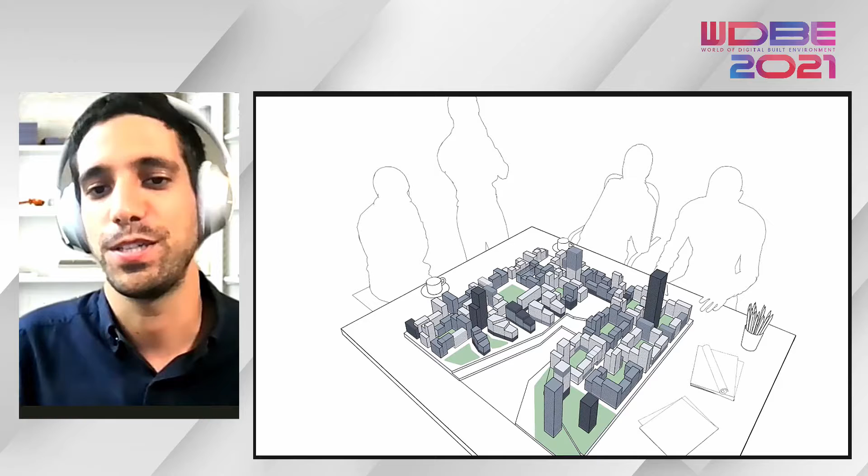This is a very complex one. As stakeholders in this industry, we need to consider multiple constraints and dimensions, like density, the functions of the buildings we are drawing, as well as living qualities such as wind and sun conditions, and even the impact our project development will have at a slightly bigger scale, at the neighborhood scale, but also at the city scale. And of course, we must consider zoning and regulation requirements, which are, at the end of the day, a set of rules created to enforce good living conditions.

And on top of all of this, we have all the stakeholders with multiple backgrounds and multiple interests. We have the architects, the real estate developers, the planning authorities, and even the people that live in that neighborhood. It's an extremely complex setup, and we know that it needs to happen very quickly.

There is a not new, but very urgent urbanization trend. And in order to keep up the pace that we are seeing on urbanization, we need to build a Paris city every week. That's kind of shocking. And we need to do it fast, and we need to do it well.

And how is really our industry responding to this urgency? Well, I don't have such good news for you. Construction is actually lagging behind when it comes to productivity. A lot has happened, of course, with the BIM revolution, but we have failed to make digital investments in early phase development.

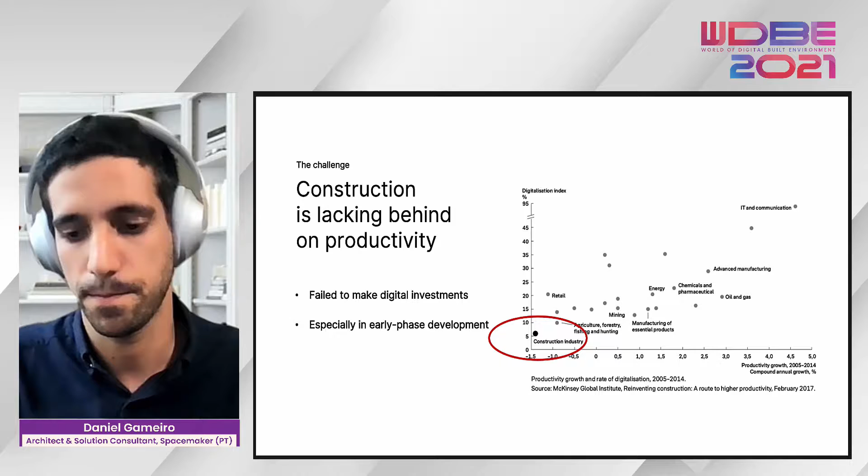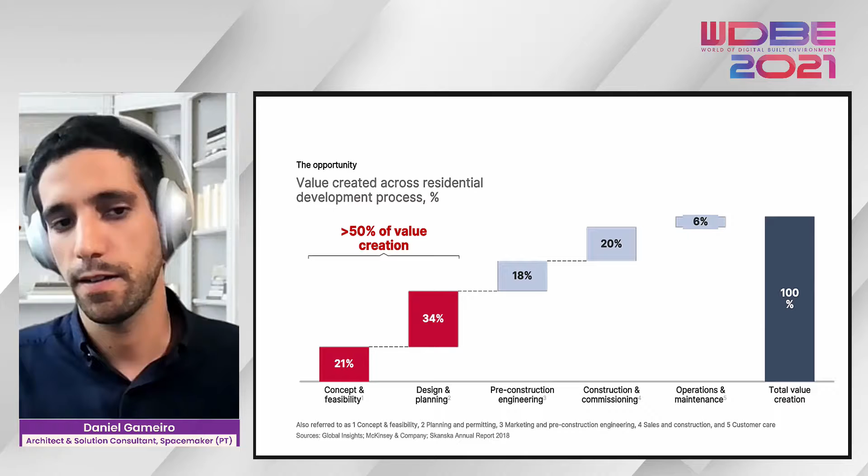However, there is good news here. According to Skanska, more than 50% of the value creation takes place between concept, design, and planning. 50%, that's quite a lot.

And how is Spacemaker solving this problem? Our technology has 4 pillars: automated data, real-time analysis, AI-powered design, and project management and collaboration. Today, we will focus more on the data rather than the generative design aspect. And everything starts, of course, with the automated data.

I will now show you a very quick demo on how a project is created in Spacemaker. So the only thing you need to do is go to a service that looks very much like Google Maps, write the plot's address, and in just a few minutes, Spacemaker fetches all the data you need and creates a 3D digital model of the whole neighborhood.

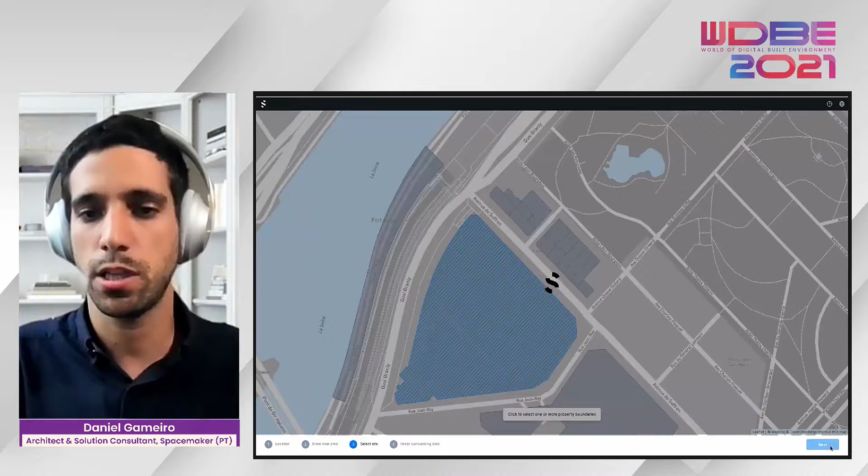The data that the software will fetch for you consists of the terrain, maps, property limits, surrounding and existing buildings, as well as noise sources. This is incredible, right? In just a few minutes, we have this 3D digital model. But then this is where the external data comes to us.

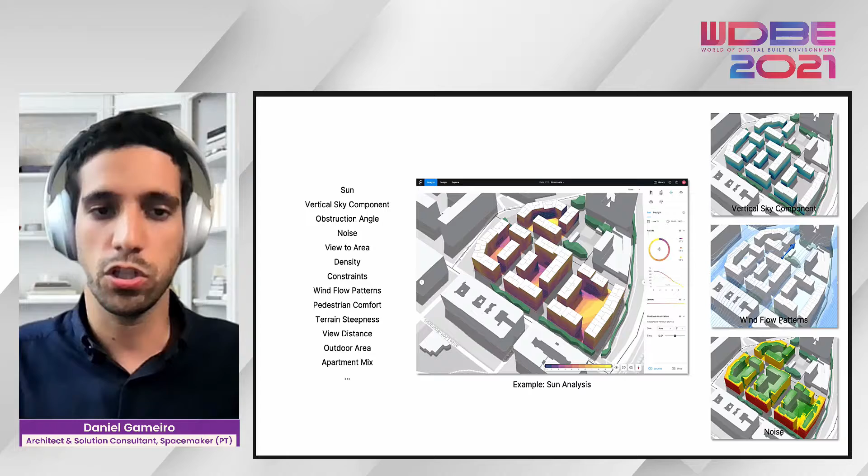Then what the software does is really start processing this data. We want to understand what is special about this site, what are the potential aspects, but also the challenges. Spacemaker runs a multitude of different analyses - these are just some examples. On the left-hand side, you have sun, daylight, noise, wind - all of the important living qualities, not only for the project, but also for the whole neighborhood. I think this is a very important aspect, focusing not only on the small scale, but also on the big scale.

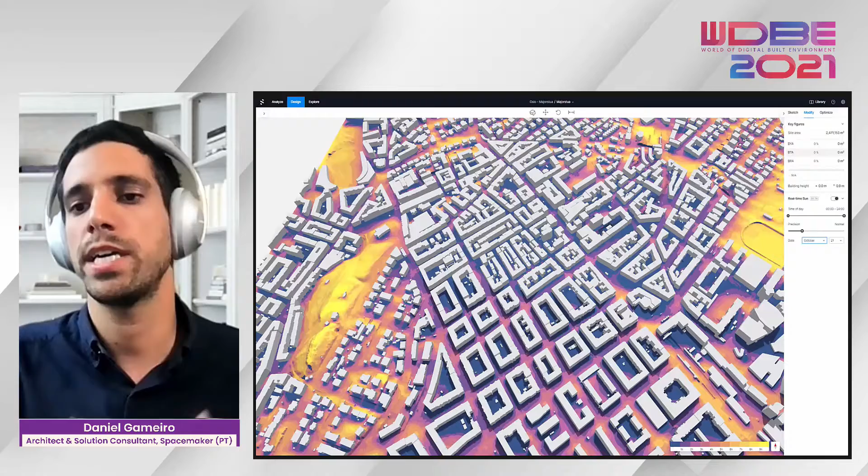And this is particularly interesting when it comes to performance-driven design. We want to understand how our buildings, our projects, perform not only in absolute numbers, but in the context of the urban setting where they are being developed. In order to understand that, what we have done is study the most popular neighborhoods all around Europe to try to understand what kind of qualities those neighborhoods have.

This is the example you see here on the screen. It's Majorstua in Oslo, and what it creates is a baseline. We can now actually compare our projects with neighborhoods that we know very well, that we know the qualities of, and we can understand if we could do better, if we are a little bit under, how much we should stretch or not.

And this is just one example, Majorstua, but we have actually analyzed many different neighborhoods all around the world. What I would like to underline here is the outcome-driven design aspect.

So let's first start with the current status quo. Let's say I'm an architect. I've now started a project. I've spent some months with my colleagues trying to develop that concept, making it very mature, discussing it a lot with my project team.

And once we are very confident about our design, what we would do at that stage is send over this 3D model to a consultant, let's say a noise consultant, which would analyze our model and point out the red flags, saying you need to revise this apartment here, it's exposed to too much noise, and advise me how to solve that.

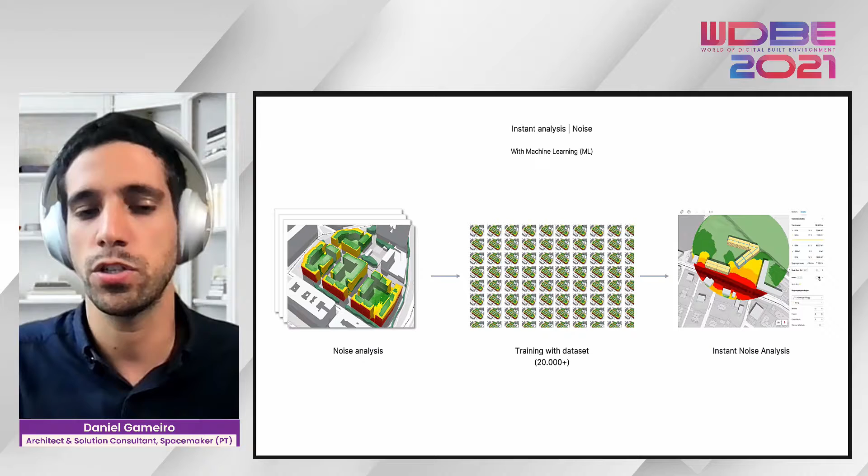But outcome-driven design really takes place when you can see things live, when you draw something and immediately see the impact that iteration has on your project as well as on the neighborhood. We really believe that's the future. It's about the performance of the buildings for those that use it, but also for those that live next to it. And what you see here is our project on machine learning for noise.

We have thousands of noise analyses that have taken place in Spacemaker. What we do is build up a data set out of it, and feed that data set into our machine learning algorithm, which then creates a surrogate model that predicts the noise conditions.

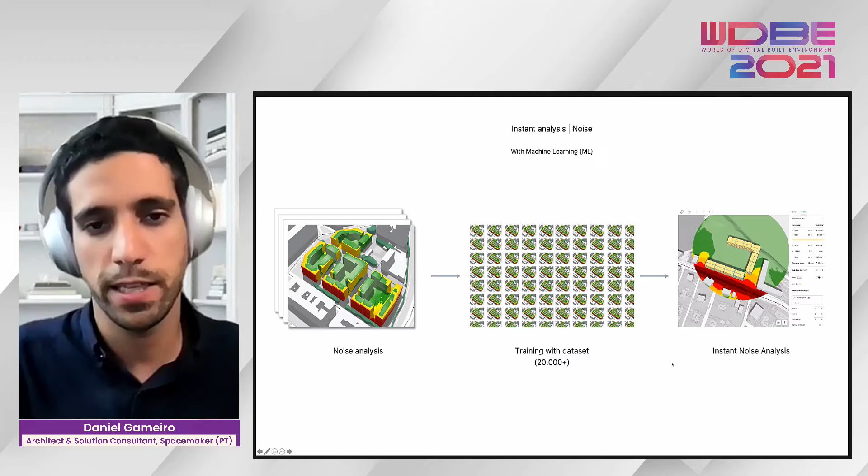Now I will play a video on the right-hand side, and you can see there. So we have these buildings, and just by making this one shorter, I click on the button, and I see immediately the results of that iteration. I do the same there, and again I see immediately the results.

This is having information at every step of the process. That's really what ultimately will enable us to create better cities. And again, we are very focused on noise because it requires a lot of computing power. The same is true when it comes to wind, so we are following exactly the same logic.

But now I would like to invite Raoul, my colleague, to explain how this technology can be used in very concrete use cases.

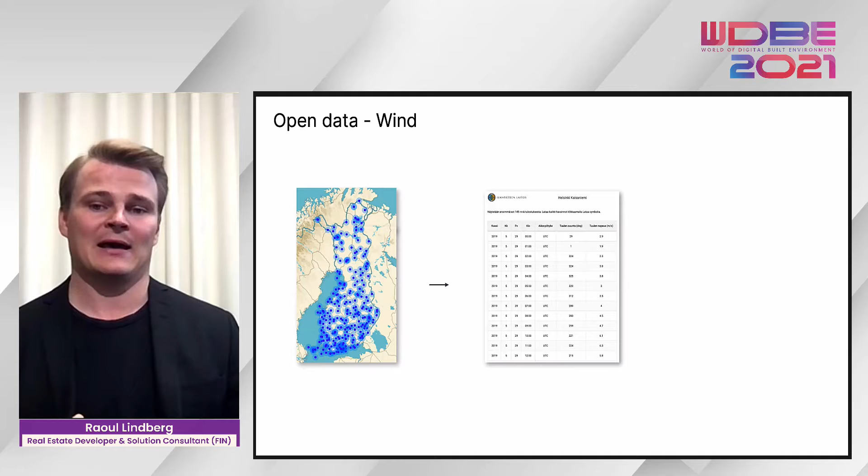So if you take, for instance, the Kaisaniemi Observatory and choose the wind direction and speed for a time period from 2019, we can now check the wind direction and speed, for example, on May 29th.

That could be quite interesting. It was actually the day when Finland won the last Ice Hockey World Cup gold, so it was celebrated outside here in the city center, and it could be interesting to know the wind speed at that time.

But if you take the average for 5 years and combine them, we get these wind roses, where we can see how many hours on average in a year wind comes from different directions and at what speed it comes.

This can be a bit more useful. If we take these wind roses and combine this data with the 3D computational fluid dynamics algorithm, we can then create a virtual wind tunnel, which we can use to simulate different wind conditions in a region from a specific direction.

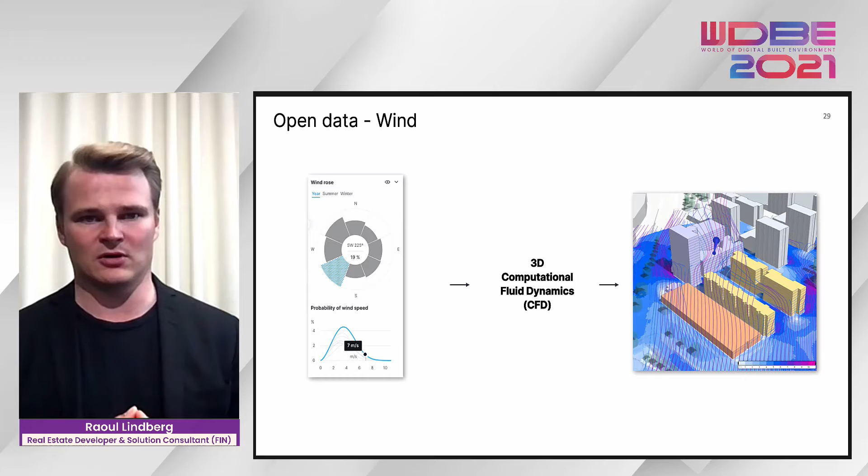This can already be interesting when you want to explore how to design your concept and how your building will affect the wind condition from one direction. But it doesn't give you the overall picture of the situation.

So if you then take all the observations for the whole year, calculate the probability and average of all of these, and combine them with a comfort scale or criteria, we can then estimate the wind comfort for pedestrians. The purpose of this assessment is to describe the suitability of different areas for certain typical activities.

In this example, you can see that most outdoor areas are not suitable for sitting, and some areas that are a bit darker in yellow or red can even be dangerous if you're cycling or for elderly people.

Andres' pedestrian analysis presented earlier would be really interesting to combine with this as well, because this also gives you a view of where it's good to actually walk or sit, or have different ways of walking.

But yeah, this was just one example of how you can take a large amount of data, combine different algorithms and criteria, and get an easy to understand analysis that we can then quickly give to the architect or the developer, to allow them to make informed decisions on the design of the area and where, for instance, to place restaurants, kindergartens, or other things.

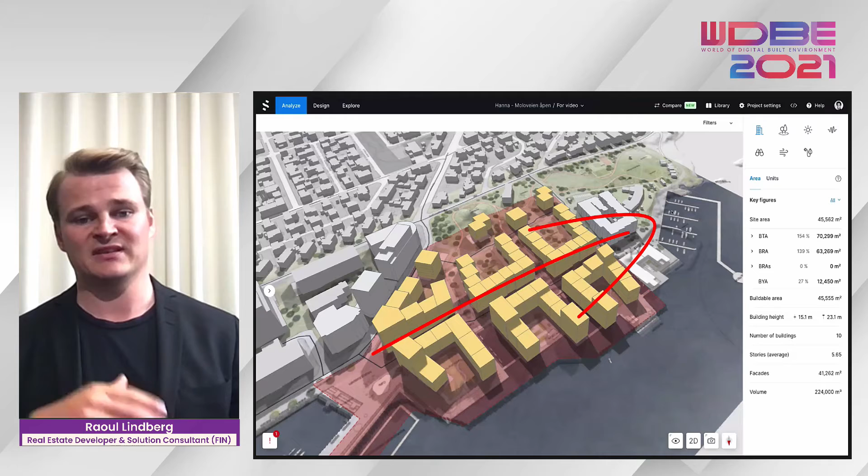So we met with the architects, Schmidt Hammer Lassen architects, the municipality, the consultants, and of course also the developer Clemens Eiendom. Together with the group, we understood how the street could become a successful public space, based on both wind conditions and other conditions.

Now you can see here a comfort scale for the whole year, based on these wind simulations for 8 different directions. On the scale, you can see with the colors that red means uncomfortable, and green means good wind conditions or somewhat better wind conditions.

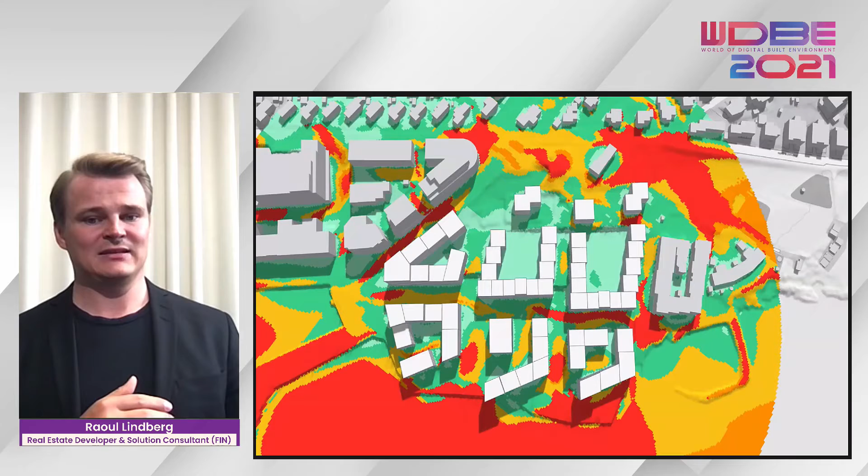As you can see, the group also understood that it wouldn't be easy, and the architects needed to iterate on this. They did hundreds of iterations on the concept and got wind analysis for all of them without involving other consultants, so they could iterate on it, see how it would change, and the whole process was documented with the municipality.

As you can see, they improved the conditions significantly for the whole year compared to the first proposals, a dramatic change even though the changes were small. And even now, if you look here at just the summer, almost the whole project was green.

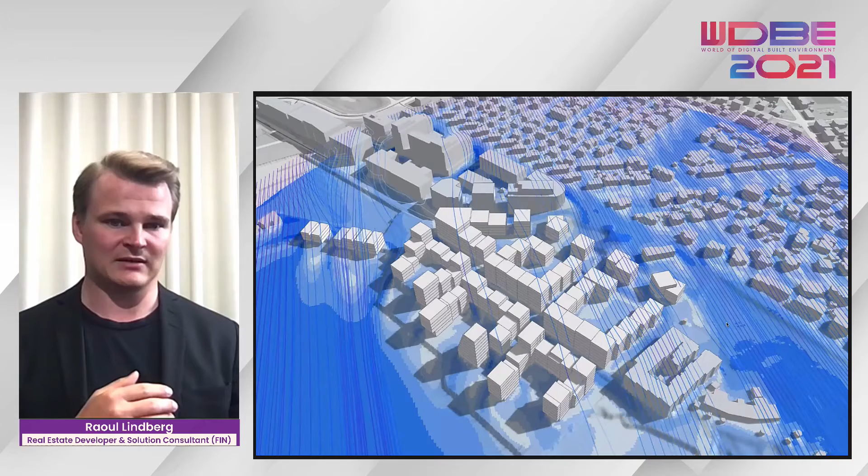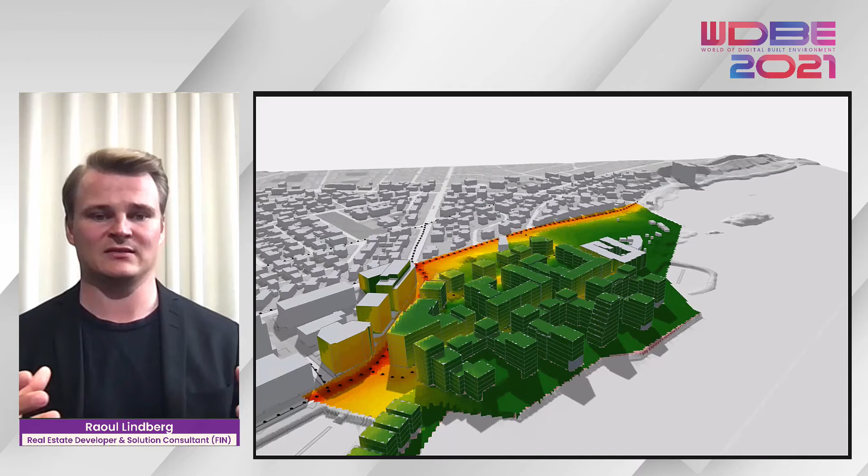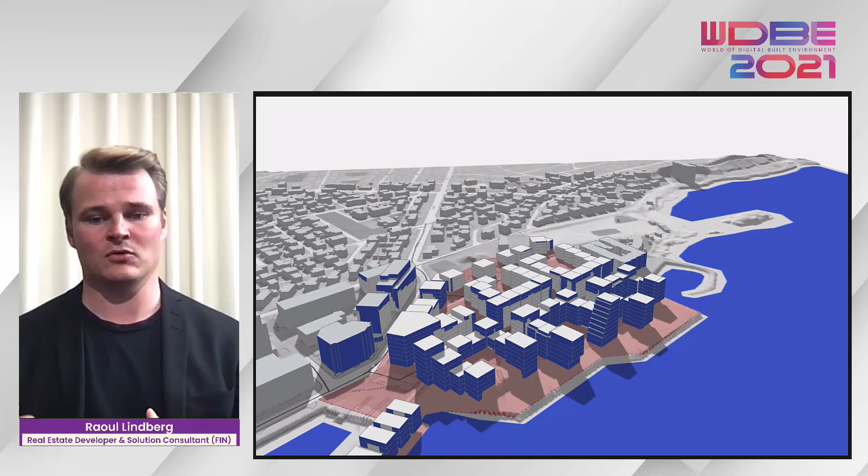Other conditions were also important to look at, such as sun conditions for different dates of the year, but also noise conditions. So noise analysis for not only the proposal they created, but also for the neighboring buildings and surroundings, to get an understanding of how it will affect noise, sun, but also the view from the apartments. Especially here, as it's really near the sea, how many apartments have sea view, and how will the new proposal change the sea view for the neighboring buildings, and be able to document it, get data points to show, and have the discussion based on these facts.

It speeded up the dialogue, saved time and resources, but also strengthened the whole planning process. In the end, it's a win-win situation where developers get quick and fact-based dialogues together with architects, while planning authorities can easily verify if the project performs as well as the context allows. But most importantly, it's for the end users, the citizens, to get areas and apartments that are actually optimized for living qualities and not only for the financial qualities of the buildings.

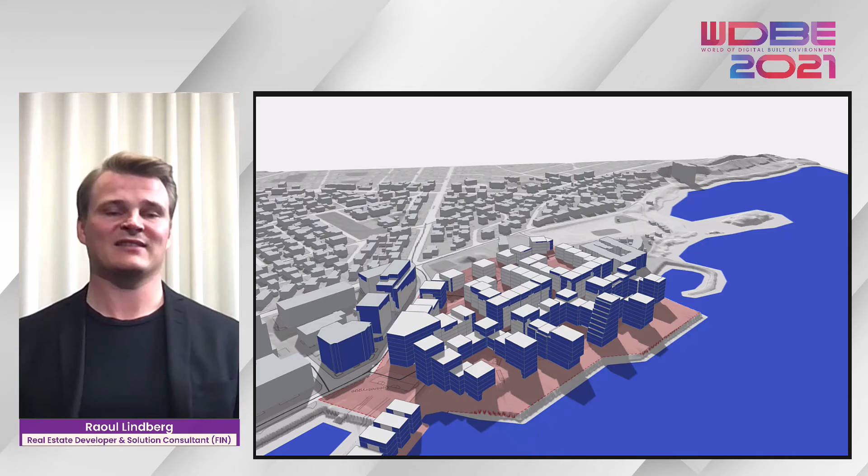This has also been tested in other projects, but I would like to end with a quote from the developer in this project, who said it allowed them to build an analytical basis early, on which you can build arguments that make the dialogue with the municipality better and more effective. By working iteratively and analysis-driven, we save time and strengthen our entire planning process. We recommend other municipalities and city developers to work in the same way. So this was a good example of how, based on facts and data, you can create and iterate on a model and create, in the end, a better project.